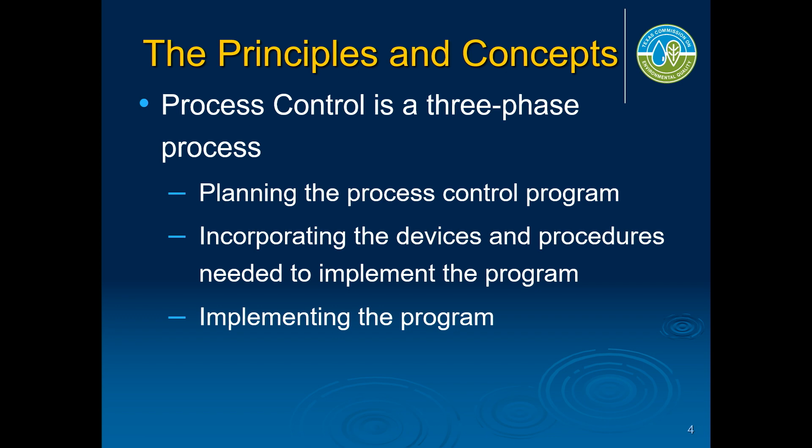You got to plan your process control strategy, incorporate whatever devices you need to collect the data, and then implement the program. Effective planning requires you to analyze the process, identifying the critical control points. Any time you collect a piece of data that you use to control a critical process, that's a critical control point. Determine the monitoring needs at each CCP and develop performance targets for each of those things you're monitoring, and identify potential corrective actions if you have something outside the acceptable range.

Don talked about establishing record-keeping practices, so you've got to keep records of what's going on. And then to go back around the loop again, verify that the program is effective, and make whatever adjustments you need to make to it.

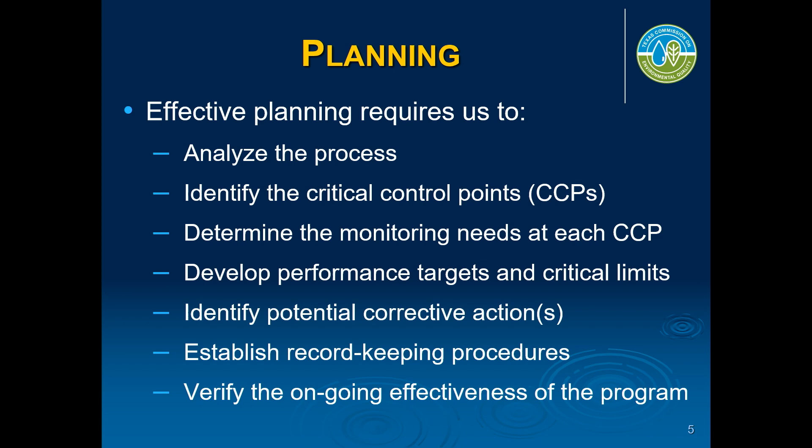Okay, process planning. What are my major treatment processes and my minor treatment processes? At surface water treatment plants, anything that results in pathogen removal or pathogen inactivation is a major treatment process. For groundwater systems, it's pretty much disinfection as the major unit process. And while those things are major processes, there may be other processes that become major units, even though they are not resulting in any public health impact. For example, there are some groundwater systems that have iron and manganese in the source water.

If you don't control the iron and manganese, you're going to be dealing with a huge, persistent and ongoing customer water quality complaint problem. So even though manganese itself or elevated iron doesn't pose an imminent public health threat at lower levels, even higher levels produce a kind of long-term threat, not a short-term threat. It may become a major treatment process for you.

What you can analyze and what you can and can't adjust or control is a factor in what you have to monitor, and what are the variables at each monitoring point. What could impact the results? Chemical treatment, what chemicals am I applying, as Don was talking about? Why am I using them in the first place? And where are they injected and what monitoring is going on?

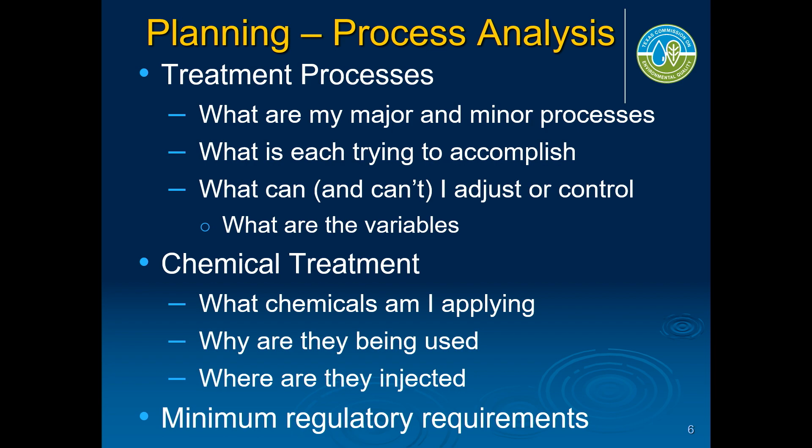The other thing that affects your planning is what the regulatory requirements are. A lot of the process control monitoring we do is for us to adjust the treatment process, right, to make higher quality water. But some of the things you guys have to do, it's because the regulations require you to do them.

Okay, where do I collect data at critical control points? Whenever I need to make a treatment decision, I need to collect data. I want to try to limit the number of variables. Let me give you an example.

I'm putting chlorine in at 3 different application points in my treatment plant, and I'm monitoring the chlorine residual at the entry point to the distribution system because the regulations require you to. While that's an important monitoring point for water quality and regulatory compliance, you need to be monitoring each one of those application points, because what happens at the end of the plant is affected by each one of those things individually.

So you need to monitor each application point so that you can figure out what's going on everywhere you're putting the chemical in. You also need a monitoring point that will allow you to quickly determine the impact of the change you've made.

At surface water treatment plants, there's the rapid mix Don was talking about, then a 15 to 20, 30-minute flocculation time, and then somewhere between 2 to 4 hour settling time, sometimes as long as 6 hours.

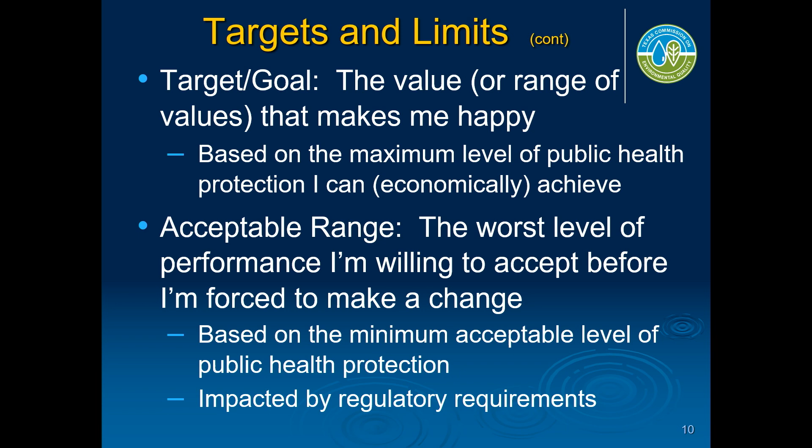I can optimize my treatment process so I don't have to build a more sophisticated treatment plant. So there are some economic reasons to do this, but it's really just trying to maximize public health protection and water quality. That's our goal. Acceptable range - here's critical control level 1, here's critical control level 2. It's based on the minimum quality I'm willing to accept before I have my operators do something different, to make a change - whether that means watching it more closely, moving monitoring from once every 4 hours to once every 2 hours or once every hour until we get back within the acceptable range. But once I hit critical level 2, when water quality becomes absolutely unacceptable, I want you to actually make a change in the treatment process. I want the water quality to improve to an acceptable level, that critical control level 1 point.

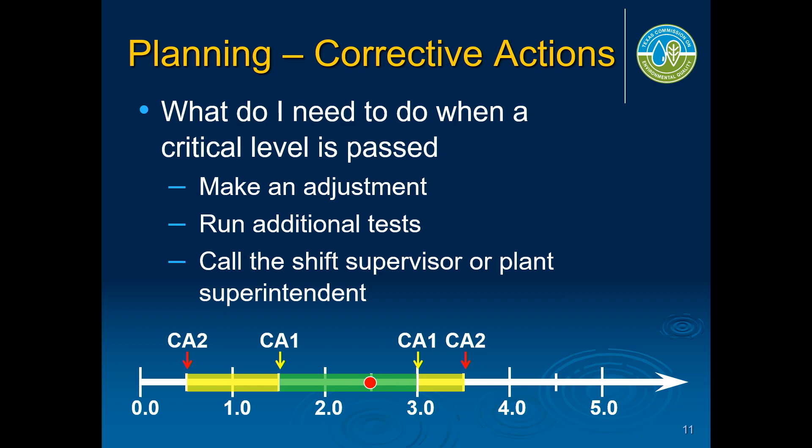Corrective action 1 is at critical control level 1. Corrective action 2 is at critical level 2. If I get down below 0.5, I'm going to have a regulatory violation if I don't fix it within 4 hours. When it hits 0.5, I want the operator on duty to call me and let me know I've hit this critical trigger and what action he's taking, so I can be confident we're going to be back in compliance before I have to tell the public we fell below acceptable levels for more than 4 hours. One exposes you to higher risk, and the other exposes you to such high risk for such a prolonged period that I've got to tell you about it. I don't want them to ever get to 0.5, but I certainly want to be involved if they get there so I know they're not there for 4 hours.

Does that make sense? All right. Okay.

Planning also has to include the record keeping that Don was talking about. I need enough data so I can investigate what happened during an event, what might have caused it, and what I did to respond, and whether that response was acceptable. What went wrong and what went right? There are some normal performance records you've got to keep because the regulations require them - for example, you've got to keep your SWMORs for 10 years, and the data that goes into building your SWMORs you've got to keep for 3 years, that kind of stuff.

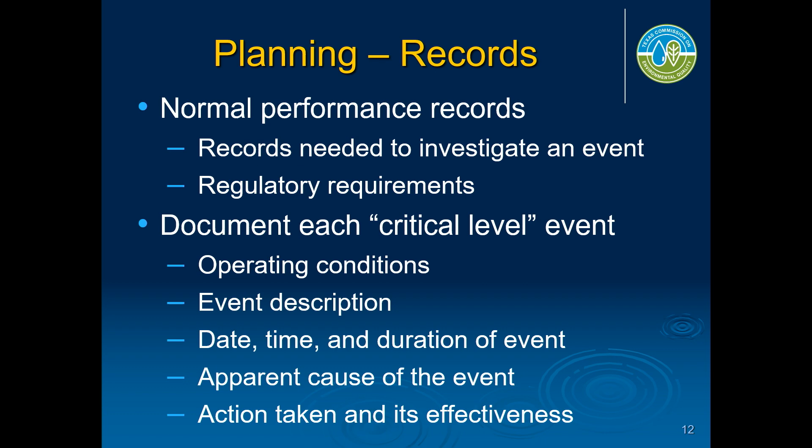Document each critical level event occurrence. What were the operating conditions? What happened - the date and time and duration, how long did it take us to address it? The apparent cause of the event and what action we took, and was it effective? It's really important to keep these records.

For me to keep these records, I've actually transferred some of my particularly successful ahas to a little portable hard drive. And I've also transferred some of my 'oh God, I don't want to do that again' moments to that portable hard drive. For example, one time I wanted to test the alarm setting on an online turbidimeter, so I said I want to take that turbidity up to 2.5. I sent the SCADA system a signal for 2.5 without being aware that 2.5 tells the SCADA system 'oh crap' and shuts the plant down. So I don't ever want to go into a plant again and run a test that makes the operators' lives a living hell for 15 minutes while I undo that damage from an artificial signal.

So yeah, keep a record of what went really well and keep a record of what went really bad.

Program review: is my process management program working? Have the number of unacceptable conditions gone down? Was a response I had particularly successful, or in my case, particularly catastrophic? And am I utilizing my data? If I'm not utilizing my data, I'm not sure I want to expend the resources involved in collecting and analyzing it. And basically, what should I change?

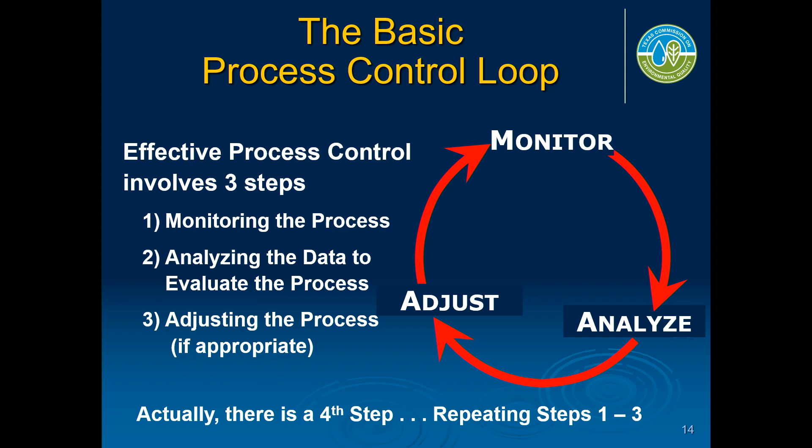So we're back to the process control loop once again, because this slide's really important. I was attending Clayton Nicolardi's session, and he repeated a slide and got all worried that he'd repeated it. This is a really important slide to repeat: collect data, analyze data, make whatever changes you need, collect more data. Even if you don't make a change, your decision is 'make no adjustment, re-monitor.' Just go through that loop internally.

Effective monitoring requires properly located and installed monitoring taps. Don talked about some of the anomalies that he's seen.

One anomaly that seems fairly common: you have an IFE with a bank of eight filters, and you decide to put all your turbidimeters in a cluster in the middle. You run a 1-inch line 50 feet to the turbidimeter, and that sample line is running 200 mils a minute. Through that 1-inch line, it may take 45 minutes to get the sample from the furthest filter to the actual turbidimeter. That data point doesn't tell you much because there's all this stuff going on during that 45-minute period, and you're not seeing the immediate response.

So have your sample lines properly sized and the proper length. I've seen sample taps installed on top of the filter effluent—air gets in there, and your turbidity sample has got a bunch of air in it, giving you high turbidity readings. I've also seen them on the bottom of the filtrate line where sediment occurs, so you get spikes from sediment that really aren't reflective of what the water going into the clear well actually is—it's not a pathogen risk. So make sure your sampling taps are properly installed.

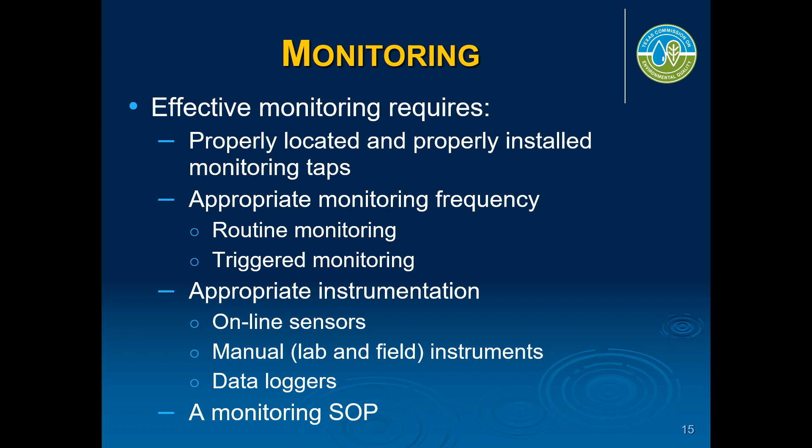Appropriate instrumentation: there are online turbidimeters or online sensors, manual lab or field tests, and data loggers that you have to have. And there needs to be a monitoring SOP—in fact, there's a TCEQ rule requiring you to have a monitoring SOP.

So, monitoring sample taps—this is an example of what I use. Even though the picture says 2 to 3 feet upstream and 2 to 3 feet downstream, remember Don was talking about mixing and how long it takes if you don't have good mixing to actually get a stable result. That's really important. I've seen plants where that distance needs to be 15 to 30 pipe diameters of length in order to get a result.

The other thing I want to point out is I've got two chemicals going in here, within 4-6 feet of one another. I've got a sample point between the two. My first sample point is upstream of the first chemical, to know how much of a change I need—what do I need to do? I do something, and then I've got a sampling point downstream: did I do the right thing? Then I'm going to put in chemical 2. Sampling point 2 shows what's going on at that point that I need to change with chemical 2. And then downstream, does this combination of chemicals achieve what I want to achieve?

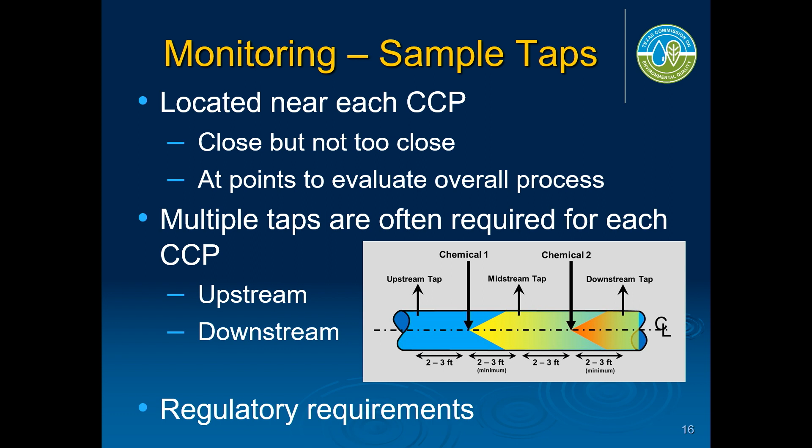In this case, I've drawn this for systems using chloramines, where the first injection is chlorine and the next injection is ammonia, LAS. One thing I need to point out to operators is this is what's required by TCEQ rules: sample upstream of chlorine, downstream of chlorine, upstream of LAS, downstream of LAS.

The reality is I need to be cognizant of the fact that if it only takes 15 seconds for the water to get from injection point 1 to injection point 2, is there any test I can run that will pull the sample and analyze the result within 15 seconds? If not, competing reactions are going to occur, so the sample result you get from tap 2 isn't really what's happening at chemical injection point 2. For example, the chlorine residual is going to be higher than you get with the test method, because when you run your manual free chlorine test, there are all kinds of competing reactions that occur in the 30 seconds between pulling the sample, adding the reagent, shaking it up, and putting it in the test kit to run the test.

That water has already had ammonia added to it, so the number you get from that free chlorine test may not be the free chlorine number that actually exists at that water sample. The other thing you've got to make sure is that you get complete dispersion of chemical 1 before you add chemical 2. If you can't get that complete dispersion, if there's no inline mixer to completely disperse that chemical, that 2 to 3 feet rule is kind of out the door. You need to understand what's going on.

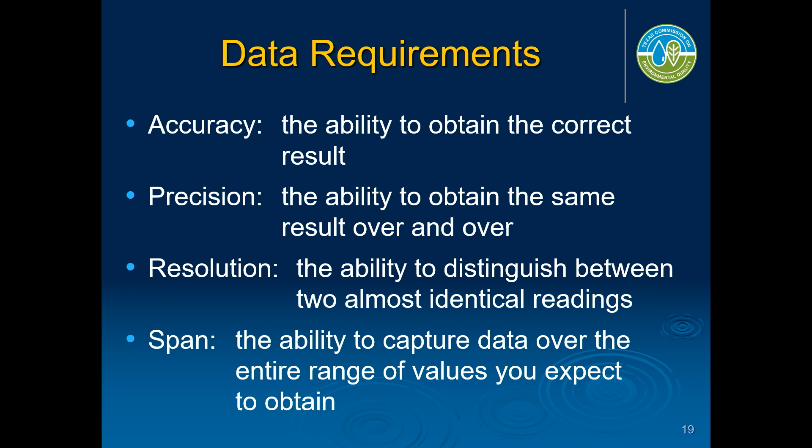The accuracy, precision, and resolution of the instrument, both for online and grab samples. Accuracy is the ability to get the right answer. Precision is to get the same answer every time you run the test. Resolution is how close of a number can I get to what I'm looking for. And span is, can I sample the whole range? Those are really important terms.

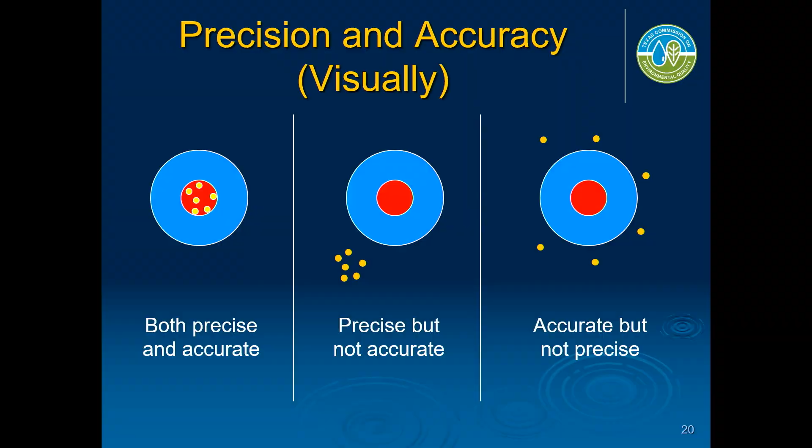Let me talk visually about precision and accuracy. Sample 1: I am precise because I get the same number every time, or really close to the same number, and I'm accurate - that number means something. The second sample: I've got real good precision, but the answer's wrong. The third: if I run enough tests, I can get an answer that's right, but I have to average all my imprecise results to get it.

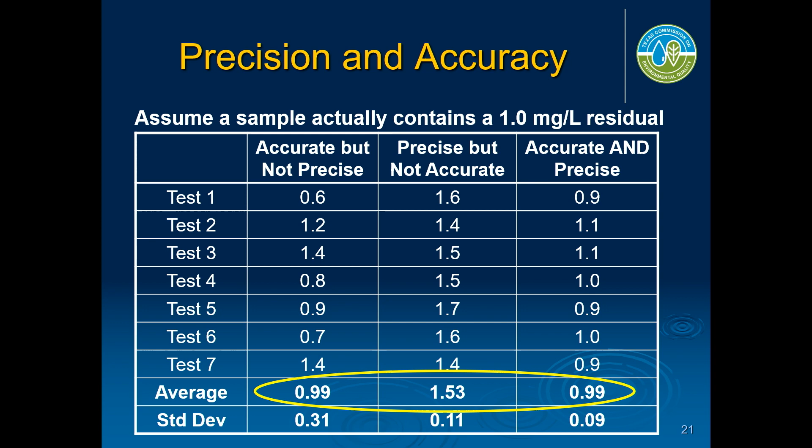You've got to run a whole bunch of tests to get the right number, and that's not a good method. Here's span and resolution: my operating range for chlorine is 0.5 to 5.5 free chlorine, and my minimum allowable residual is 0.2.

These are samples where I get span only because I can't measure 0.2, or I get span only. I get resolution only because I can't go up above 5, and some of my numbers, my target acceptable residual for me is 5.5, okay? And then method 4 gets me both.

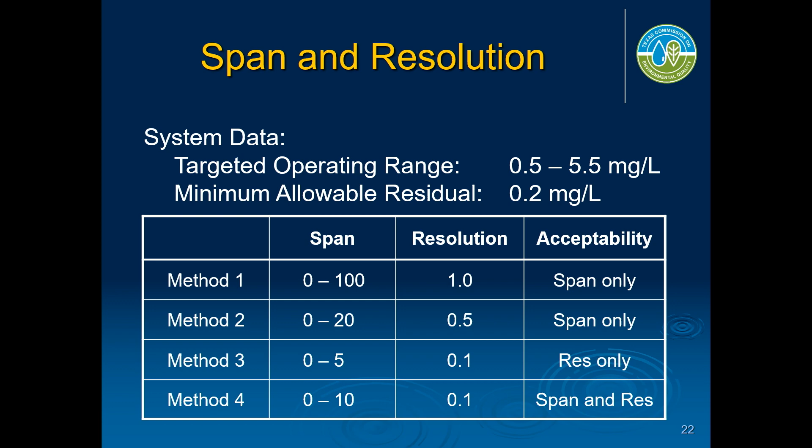So what are the regulatory requirements? For individual filters, combined filters, and entry point residuals, there is a regulatory requirement that you have the ability to measure and record individual filter numbers from 0 to 2.2, because 2.0 is an action level, a critical action level that requires follow-up studies. Don talked about mandatory comprehensive performance evaluations. If your filters keep hitting 2.0, you're going to get a visit from TCEQ to help you figure out what's going on.

You can do it one month. If you can figure out what's going on and fix it, then we won't show up. But if you do it two months in a row, TCEQ is going to show up, and they're going to ask you administrative questions. They're going to ask you about operational design, maintenance. They're going to ask you all kinds of questions. It's four or five people for four or five days. I mean, they spend a lot of time at the treatment plant trying to distinguish between a symptom and an underlying disease. What's the real problem? So they try to help you.

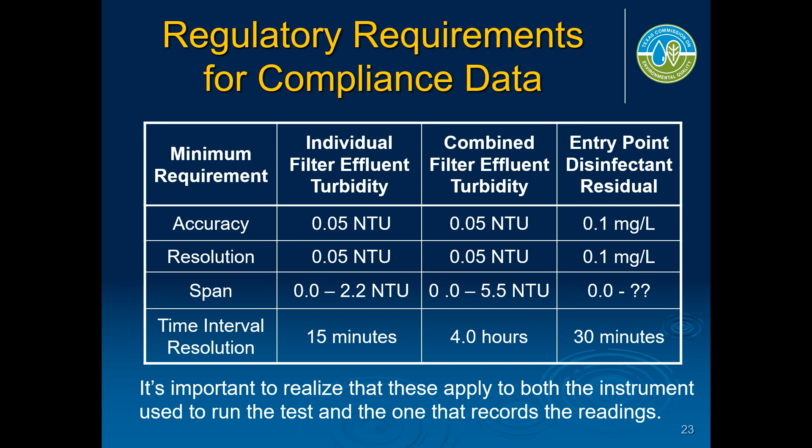But you'll notice that for span, for entry point disinfectant residual, it's 0 to, what's this number? The number is based on what you expect the maximum level is to reach the distribution system, because TCEQ or EPA, neither one of those agencies have a maximum residual entering the distribution system. They have a running annual average for all of the samples collected throughout the distribution system averaged together.

They have a minimum entry point, but no maximum entry point. So as long as your average stays below the limit of 4, you can enter the system with 15, assuming you don't get customer complaints. Which, I have a war story, but I don't have time. Oh, darn. So anyway.

Analysis. Data analysis requires you to present the data in a format that allows the operator to rapidly assess the results, and compare the results with the performance goals or acceptable range. And Don talked about SOPs. You need to have SOPs that tell the operators what these acceptable ranges are and what your expectations of him are, okay?

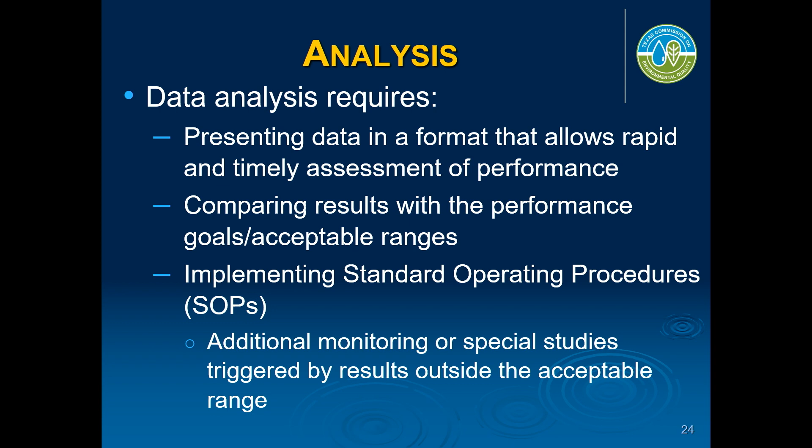Real time, there's the HMI displays on the instruments. The SCADA system, control room, and the alarm levels need to be tied to whatever critical points that you want to set. The historical data needs to be accessible.

We've visited plants where they've changed out the SCADA system, and the new SCADA system can't read the data file from the old SCADA system. So when the TCEQ investigator came out and asked for data that was 18 months old, the plant could not produce it, and they got cited for a violation.

They still have it, but in order to access it, they have to take their new SCADA system offline, put their old SCADA system back in, and produce the report for TCEQ, and it's just not possible.

So make sure that whatever format your data is stored in, the data that's 3 years old needs to be in some accessible file like XML or CSV, something that's readable by Excel or your new SCADA program, okay?

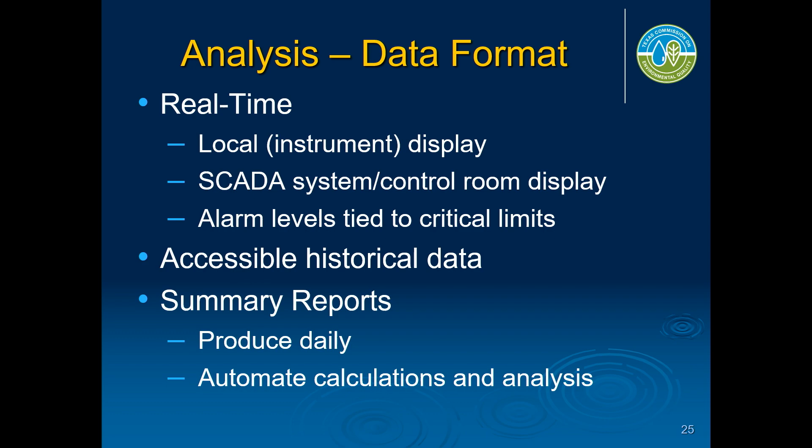And I tell operators the importance of getting management and your SCADA guy to produce reports for you so that you don't have to scroll down through 96 filter readings and turbidity readings off of each filter and figure out what the highest was, and then go over and look at the filter to check whether it was actually discharging into the clear well. No, it wasn't. Crap, that reading doesn't count. And they have to repeat that process.

Having the SCADA system automate this with reports will save you somewhere between 2.5 to 5 hours a day of operator time at a large plant. At a small plant, it will be less than that because there's fewer filters they have to look at. You have 5-minute data for a membrane plant, and it's going to take a lot longer if your SCADA system doesn't do these reports for you.

Okay. SOP content, Don talked about it.

SOPs need to have the title and version number, the date originally adopted, and the date of each revision. They need the objective, the equipment needed to implement it, and step-by-step procedures. For example, step-by-step procedures can refer to the Hach manual for running free chlorine. You don't have to repeat everything in one SOP that's already in another - just reference that other SOP.

SOPs should explain how to document and interpret the data, where results should be recorded, and what the action levels and responses are. Operators need to understand how to use the SOP, so be sure to train them. TCEQ says review every year, but probably every couple of years you need to look at them. If operators see the SOP isn't meeting their needs, accelerate that review process and bring it to the top.

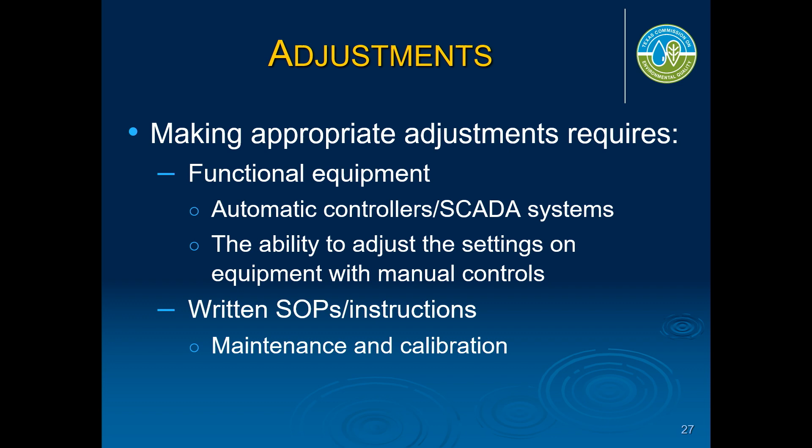Making adjustments requires functional equipment. For most plants, that means automated SCADA equipment, but you also need the ability to manually adjust if needed. Written SOPs and instructions need to include maintenance and calibration requirements. All of these process control concepts have had an impact on TCEQ regulations.

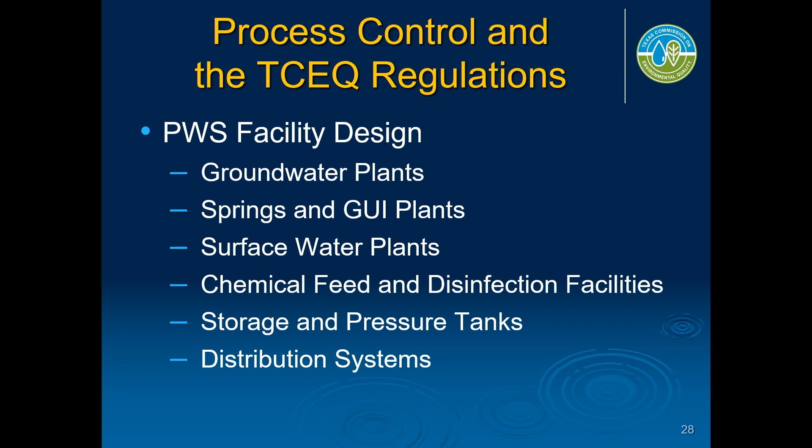Let's look at facility design and PWS operations, starting with groundwater design. The rules say you've got to have meters for flow rate and production data, sample taps for all your treatment processes, and whatever your treatment processes are, you have to have the laboratory capability.

TCEQ gets pretty flexible for groundwater systems where water quality is fairly constant. For example, if manganese levels are 0.24 or 0.024, and I want to treat it because it accumulates in my distribution system and causes problems, I'll need to run a manganese test. But manganese levels don't change much, so TCEQ may not require a manganese test kit - they may allow you to send it to a lab since you may only need to check once or twice a year to make sure nothing's changed.

If I'm feeding orthophosphate to control manganese, TCEQ might say manganese levels are pretty constant, you're not fluctuating your orthophosphate every day, so I'll let you send the orthophosphate sample out for phosphate testing. There are also special treatment processes like RO, which we'll talk about later.

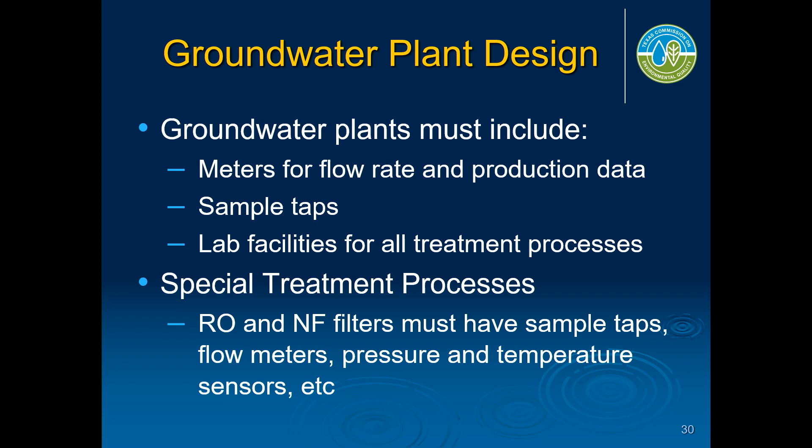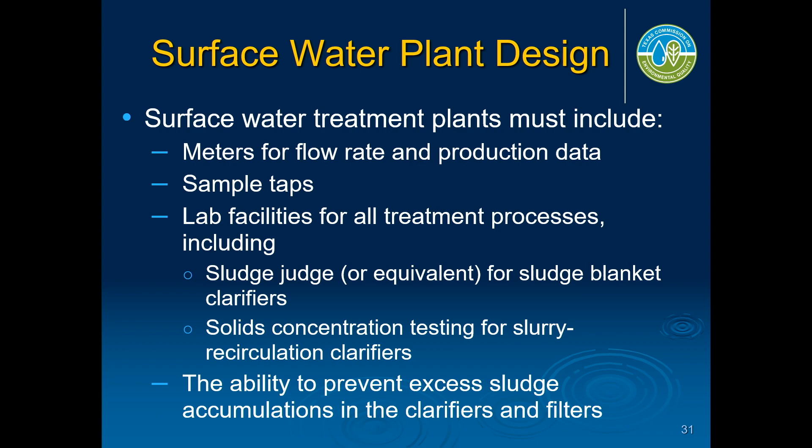Surface water treatment plants have much more variable water quality. They still need meters and sample taps, but now they need a lot more lab capability - you've got to be able to run alkalinity, pH, and turbidity. If you've got a solids contact clarifier, you have to measure the sludge depth or the solids concentration in your slurry, depending on whether you're running sludge blanket or slurry recirculation.

Don talked a lot about slurry recirculation clarifiers. For those, it's not so much the importance of the sludge depth outside the skirt, it's the concentration of solids in that slurry recirculation zone. If you don't build a high enough concentration of solids there, you'll never get a settleable floc that will settle to the bottom of the basin.

In a sludge blanket clarifier, that blanket of sludge around the center cone is the physical removal process. So you need to measure how deep that blanket is - that's really important. It's not so much the solids concentration in the blanket, it's the depth of the blanket and what it looks like through its whole depth.

Don talked about plants we've seen where it's just a basin full of sludge with water zooming across the top of it. The only reason it's not all full of sludge is that the velocity of water coming across the top scours the sludge and takes it over to the filters where it gets removed - hopefully. At this plant, it wasn't.

Surface water treatment plants need IFE and CFE turbidimeters, loss of head gauges - though there are alternatives to loss of head gauges - rate of flow controllers, and limited slow opening valves. Don talked about not wanting to open that backwash valve right away and slap it hard - you don't want hydraulic surges. When the filter comes online, you want to be able to ramp it up and down properly.

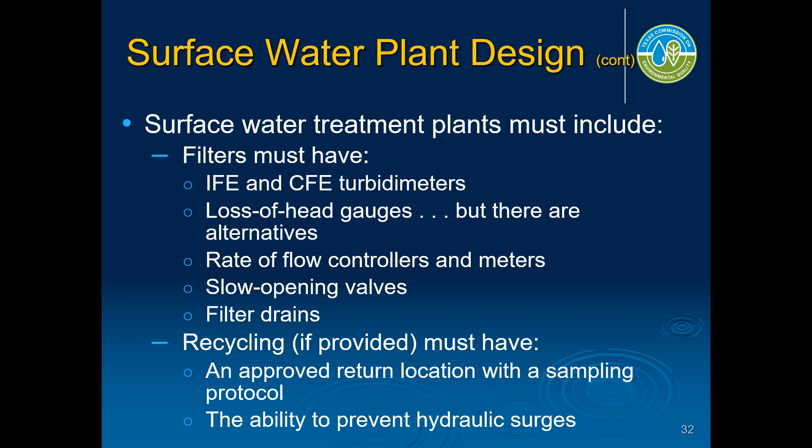You need to be able to drain the filter for filter inspections - you've got to get the water out to go in and inspect it. Recycling, if provided, must be done according to a plan approved by TCEQ, and it needs to prevent hydraulic surges on the sedimentation and filtration processes. So if I'm running a 1 million gallon a day plant, I don't want to slap it with another 300,000 gallons of recycled water in 15 or 30 minutes. I want to bleed that recycle stream in at 100 gallons a minute over 3 or 4 hours, because that recycle stream impacts the coagulation and disinfection processes.

Chemical feed systems need to control the chemical feed and disinfectant feed, with sampling taps before and after each chemical feed application point, and lab facilities to measure all the residual and disinfectant levels.

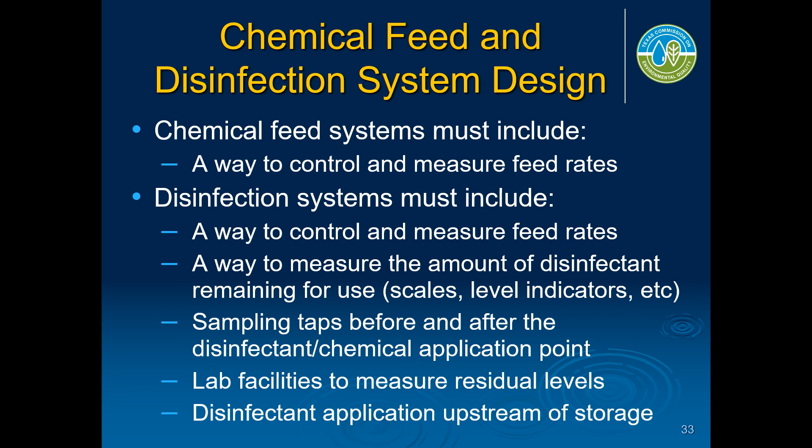Alternative processes - the regulations cover the monitoring requirements for conventional or the more common treatment processes. But now we've got bags and cartridges, now we got membranes, now we got UV.

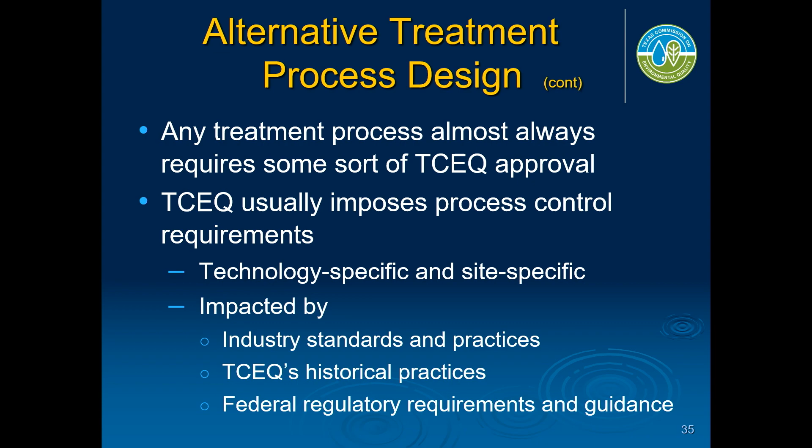When TCEQ writes permission to use alternative treatment technologies, they typically have an exception, and what that exception does is set site-specific monitoring requirements for this technology at this particular plant. Those practices, those requirements imposed by that exception become regulatory requirements. They become enforceable. So if your exception says you're going to do X, Y, or Z, you must do X, Y, or Z at whatever frequency TCEQ told you to do them.

If you don't, TCEQ will cite you for a violation of the rules and send you off to enforcement. So it's really important for you to understand what's in your exception. And if things have changed and that exception should be modified, talk to TCEQ and get that modification in writing. The field investigator can't do it, and I can't do it over the phone with you. It's got to be in writing. No print, no count.

All right, storage tanks. We've talked about treatment, but I want you to understand that this concept of process control affects storage tanks and pressure tanks too. There are rules that say I have to be able to know what's going on in my storage tank. I've got to have a water level indicator. I've got to have a way to drain and clean the tank. I've got to have all this stuff so the operator can do what he needs to do to make safe, high quality drinking water.

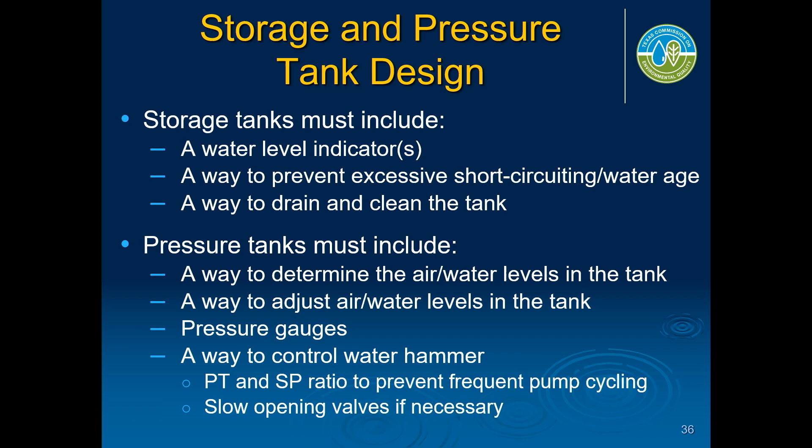Same way with pressure tanks. It affects the distribution system. I don't know if you remember earlier in the day, if you went to the general session, Jason talked about capital improvement projects, and where he talked about needing to prioritize what you're going to do with your money. This is the same part of that. This whole process control thing extends beyond treatment or design. It affects everything.

And then Russell talked about, he showed you the cutaway of that flush valve - that control, that isolation valve, where it was all gummed up and wouldn't work. Man, if that valve is critical to your distribution system operation, you better make sure it works.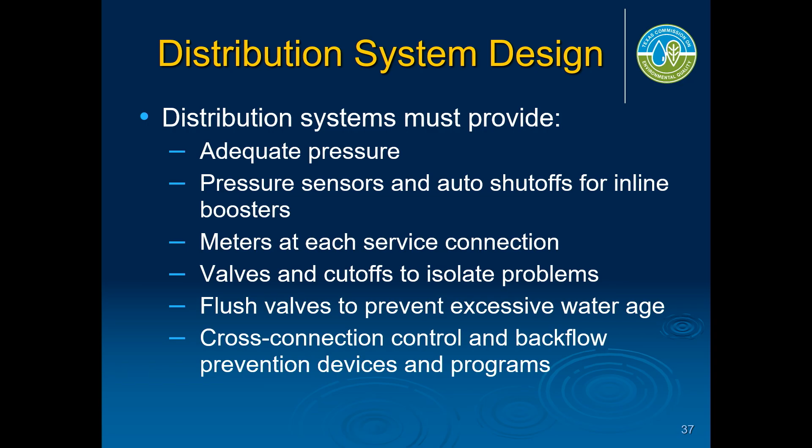We've been to plants where the folks went on a boil water notice because they drained their elevated storage tank, because the flange on the elevated storage tank that allowed it to be drained - the vendor didn't put a valve on that, he just blind flanged it. So the only way to drain that tank so they could do maintenance on it was to drain that water into the distribution system. They drew that water down and it peeled everything in that tank off the side, out of the bottom of the bowl of that tank, and sent it off to the customers.

They had paved the roads and covered all their isolation valves, so they couldn't direct the water to a flush valve. The only way they could get it out was to send it to the customers. And they went on boil water notice.

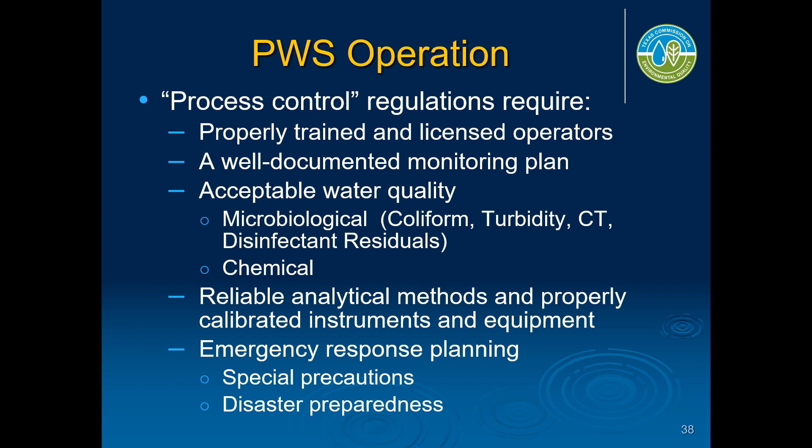So anyway, I'm out of time. There's also process operation, PWS rules, if there's questions and answers, okay.

First person you ought to talk to - yeah, thanks Don, pointing at his watch - first person you ought to talk to is your field investigator, or you can contact the Water Supply Division. This number, 239-4691, that's a really handy number. If you call that and tell the receptionist what you want, she will direct you to the staff member that can help you. If all else fails, call me. But just bear in mind, I don't have any official answer. I can tell you what the rules intend, but I can't make an official determination.

Be sure that if you've got a process control tap, you shouldn't be using that for compliance monitoring, because every sample that you take at that process control tap becomes a compliance determination. So have your compliance sample taps be distinct from your process monitoring sample taps.

That was the point you were trying to make, right? Yes, that's a very good point. Man, it was hard not to curse during this.